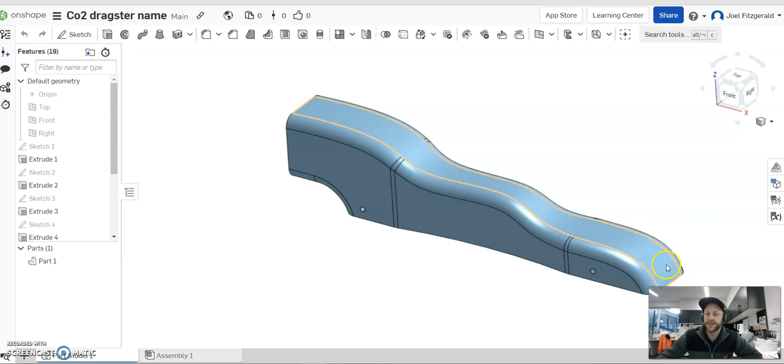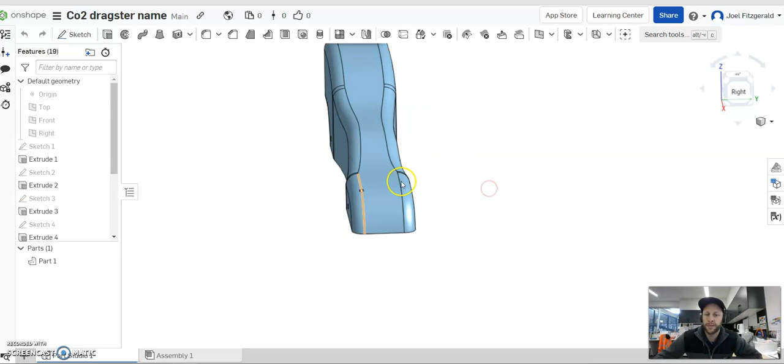Once you've got your model set up like this, I showed you in the last video how to create some fillets. There's quite a lot you can do to shape and style your work from here. I've seen some students cut out holes and extra pockets for weight saving, or cut things through the guts of it all the way through. There's probably quite a few things you can do to the design, so have a go at doing what you can to make it unique.

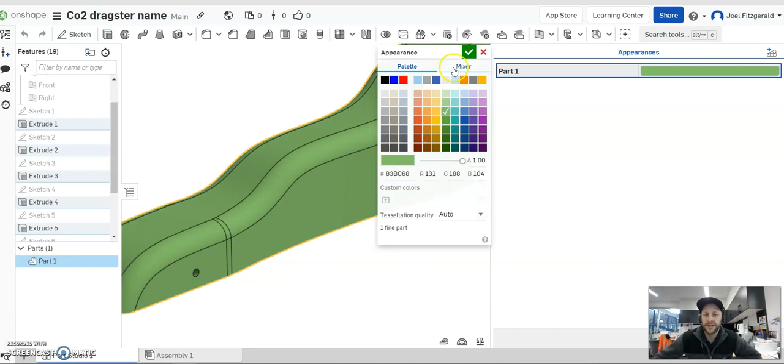Beyond there, a few other things you can do is change its appearance. By default, it's blue, but you can change the color to whatever color you want. It's just going to show you roughly what it looks like. Obviously, that's just going to be the graphics in the program.

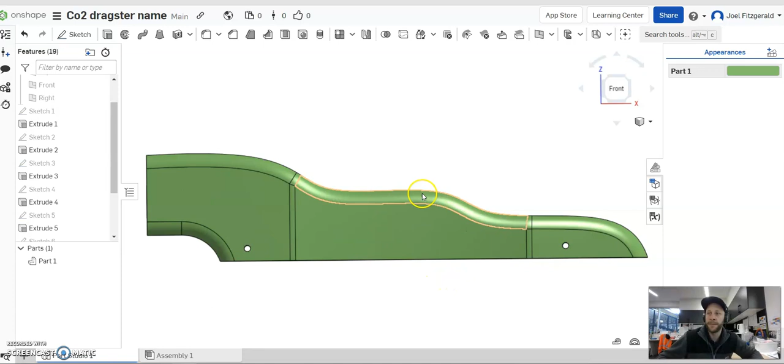The next thing you can do before we do some drafting is chuck some wheels on your car to get a bit more of a visual of how it's going to look. I'll show you in another video, the final video, about how to do assemblies, but it's not a must that you do that. You can just simply sketch on what you think the wheel is going to look like for proportion.

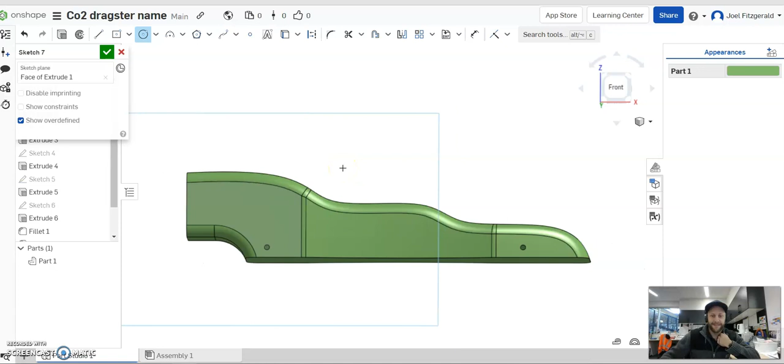What we can do here is click the sketch tool and click on a face, and then draw some circles where the axles are. These come down, so the back wheels are going to be 40 millimeters diameter, and the fronts are 35, slightly smaller. Try to pin that in the center of the holes there, then use the dimension tool to draw them up. The back wheels are 40, and the front wheels are 35.

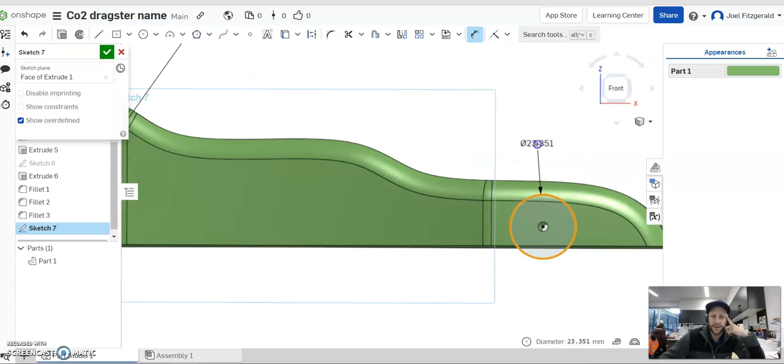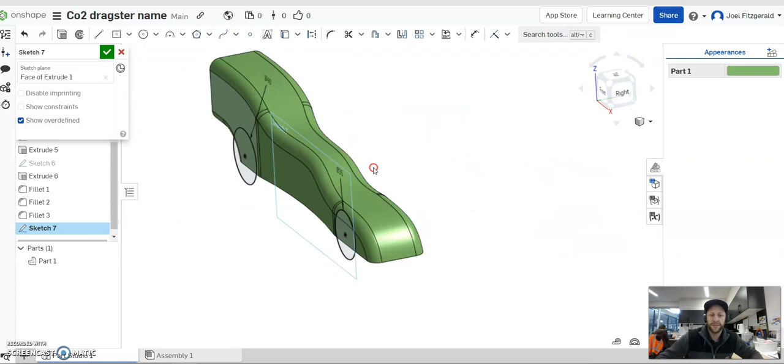Press escape to get out of the dimension tool, and there we go. So without actually extruding them, you just get a good visual from the side of the proportions of your design. Mine's got a cool little relief at the back here. That front wheel is going to look quite even with the height of my body, and if I extrude from there, it's going to make it look 3D. Happy with that? I'm going to click the tick to finish that.

I'm going to right click and just turn off that sketch, so the little eyeball turns it off. Design's ready to go.

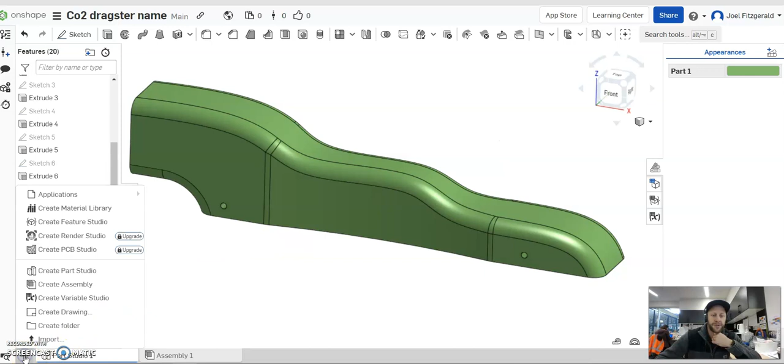Now I'm going to show you how to draft it. In OnShape, bottom left, this little plus tab, we're going to go create drawing.

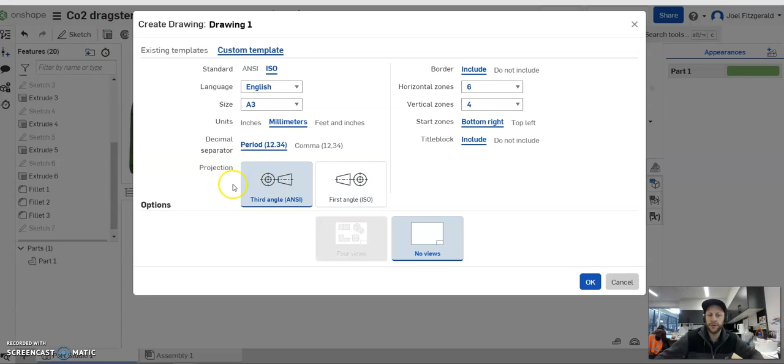In this setting, it's really important that you use the settings I tell you here. Go to custom templates. The drafting standard we're going to use is ISO, English is our language, and change A4 to A3 so we can fit this on here. Millimeters is fine, and change this projection to third angle, that's what we use for our view layout. Then go OK, and it will create the template for you.

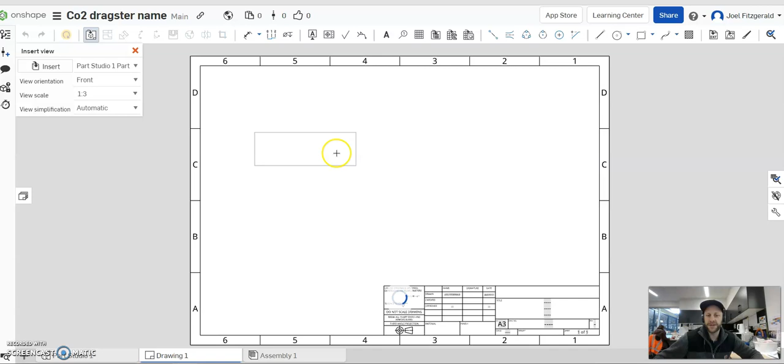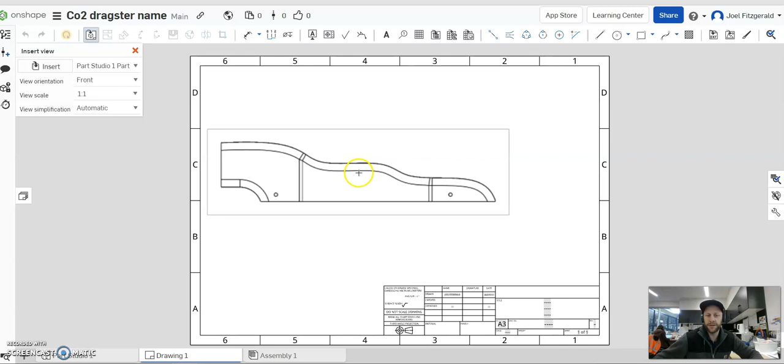Now this should pop up, asking what are we actually going to draft here, so we're going to choose our part 1. Then it's going to try to throw us a view to start with. On the top left here in the view command, we want to change our view scale to 1:1, giving us a full scale view. This is going to start with our side view, which is perfect. Now let's place this in the center of the page, but off to the left. There we go, there's our first view.

Now from here, it tends to want to go into drawing our projections, so we do want a number of views here. If I drag above my work, I'm going to do a top view.

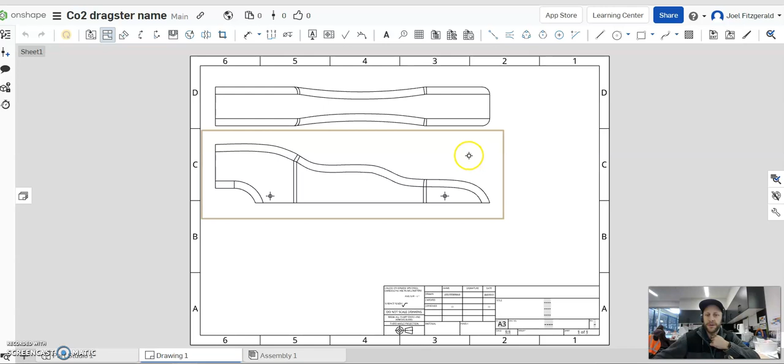And I can also go below... no wait, let's press escape for a sec. To do more views, we go over to projection here. You always need to start by clicking an existing view before you drag the projection. So I can click on that side view and draw a view out here, and I can also click again and do one underneath, like so.

It's pretty important that you have at least 3 views - a side, a top to see these cutouts, and a front view as well. It wouldn't hurt to do a bottom view too, it just gives you a bit more perspective of your designs.

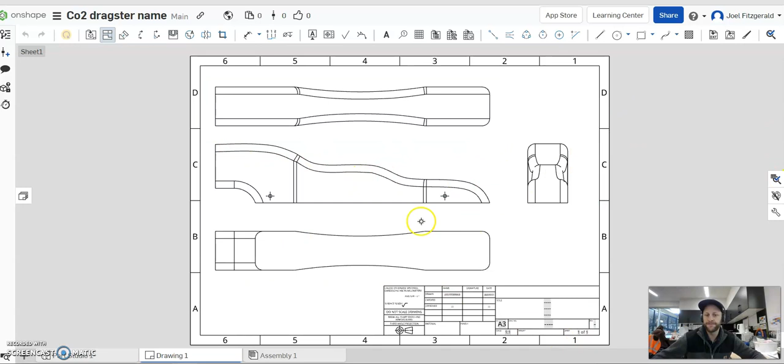And that's basically what you need in order for us to actually print this full scale and cut this and use this as a template for our construction.

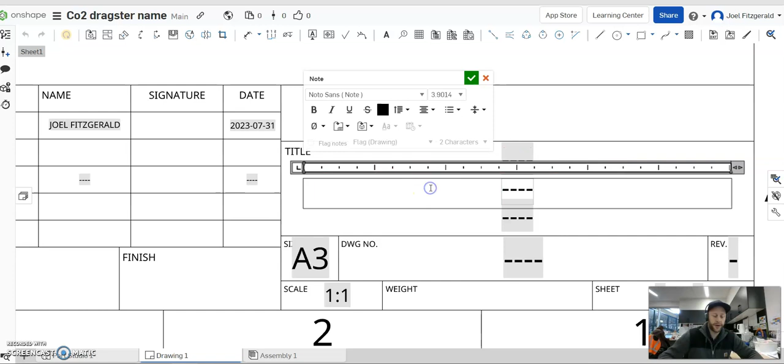Down here in the title block, you can click on these values here. So let's just double click top here. Double click here. So the title is going to be CO2 Dragster.

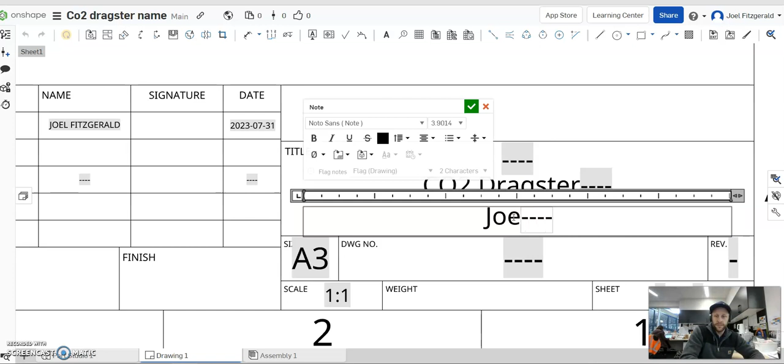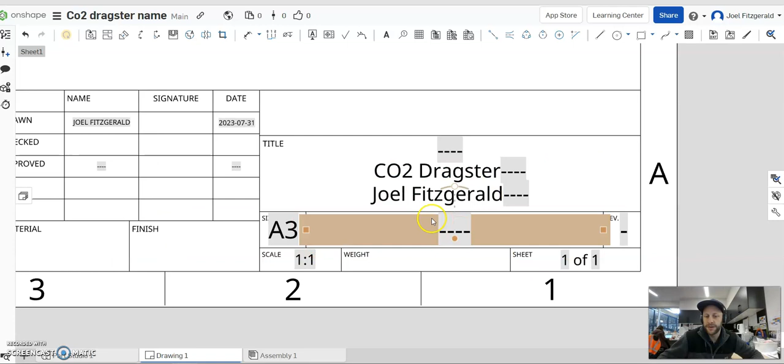That's fine. I'm just going to do revision 1 to start with in case I change this down the track - I can change it to 2. Cool. All right, just put your name there.

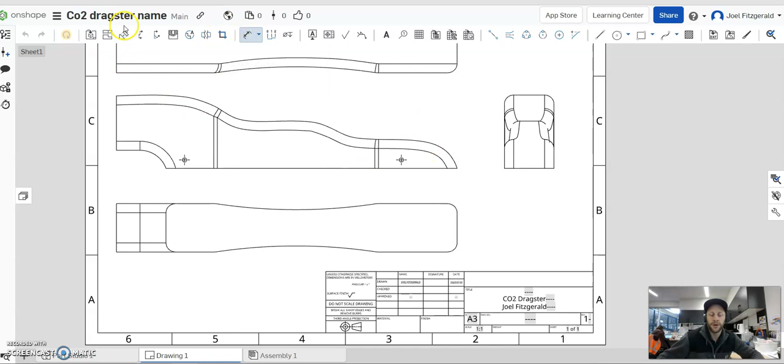Now, the last thing with our drawings we can do here, which is important, is to do some dimensions. So just like your sketches, you can use the dimension tool on here. This is going to be really useful to double check that everything's going to comply with our specs.

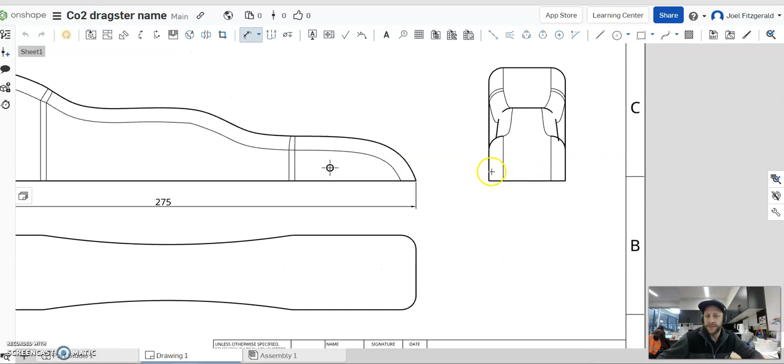So I can go point to point, for example, draw that 275. I'm going to check the height as well, which is 60. From this view here, I'm just going to make sure that my width is 40.

Yep, that's good. These hole positions are probably really important as well because you may not be able to use your template, so you might better use your drawing to check these. So let's go from this end to my hole center - it's 45.

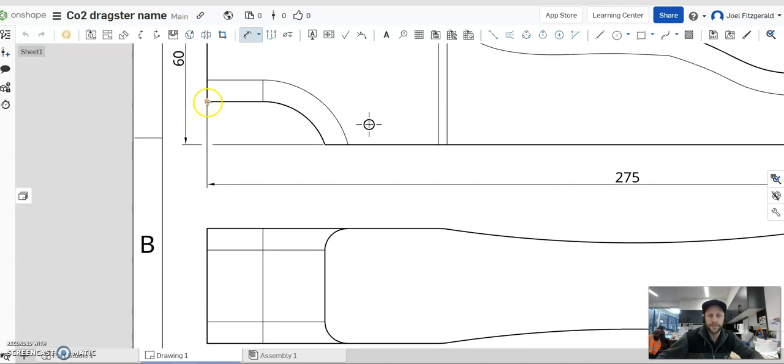This one I go from here to my hole, 55, and then double check from the bottom there, 7. Bottom to that hole is also 7. So at least I can use my drawing here for construction.

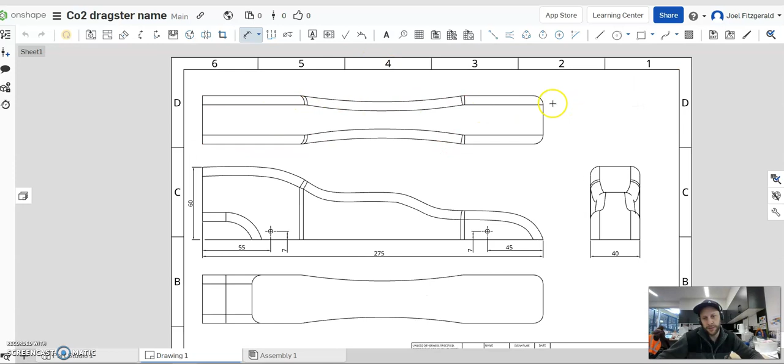This top view is pretty cool as well. That might be a little bit hard to get the measurements of that one, so you could potentially measure where that is - a little bit hard to grab there, but you can roughly get from these ends to the curve. Bit of a weird dimension, but at least shows you what the go is there.

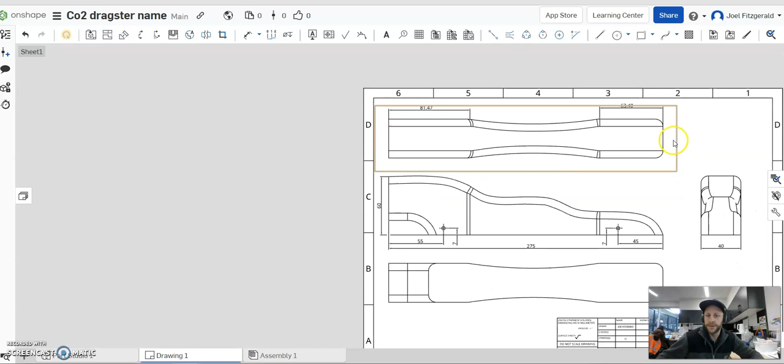That's not very useful. Cool. That's all you need to do in this drawing here - those particular views and those dimensions.

What you can add, we go back to insert view, using the same part. I'm going to actually put in an isometric view. You see how this is really big and it won't fit on your drawing. I'm actually going to downsize this one, so maybe make this one 1 to 5. Oh, it's tiny, maybe 1 to 4.

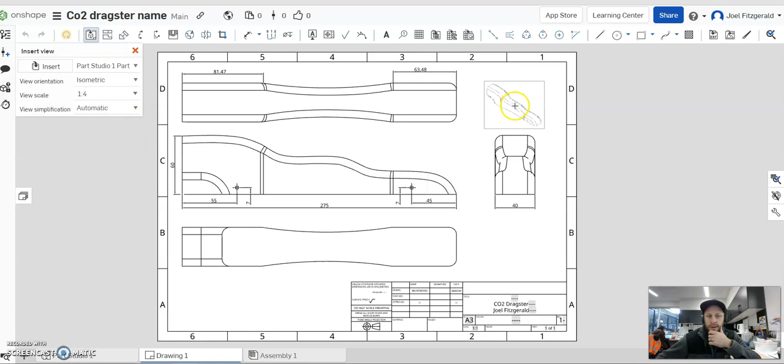Still little. I can put in a view there - 1 to 4 isometric view. Cool, that is it. That is your drawing.

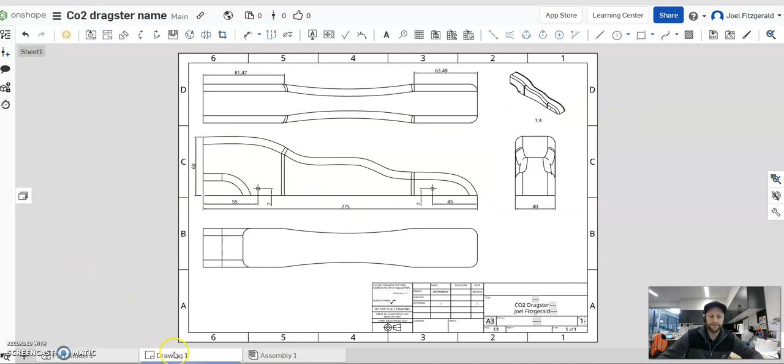By default, it saves it in your work here down at the drawing. And then in order to get this out of OnShape, one thing we can do on this one is right click and go export. We can export this drawing as a PDF.

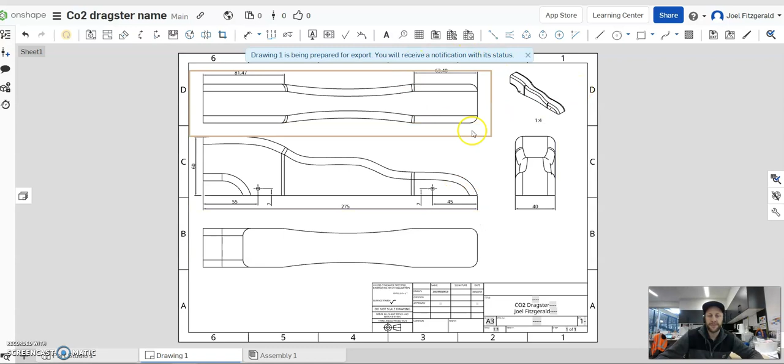Leave everything as it is. Drawing 1, go export. Just takes a few seconds to sort this one out. It's going to ask you where to save it, so chuck this on your H drive. Drawing 1 should be alright there, and go save.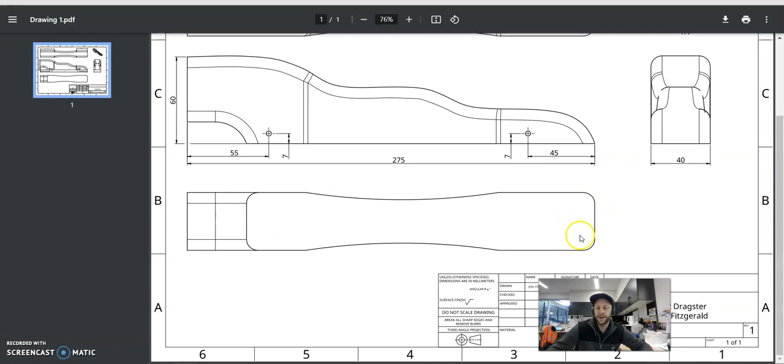And that should download your drawing. There we go, you can preview it. If I now go to print this document, what I can do is print to the Creative Design printer.

I'm not sure how you'll go actually printing this yourself. What I will ask you to do actually is to submit this to Daymap so I can check it with you and then we can print this off.

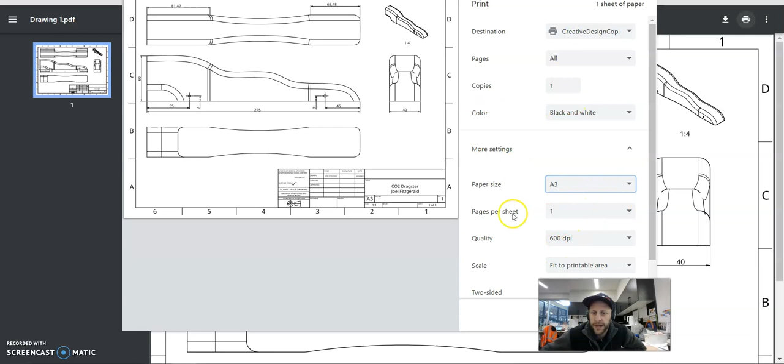But we can go in and set up our printer for A3, make sure everything is fit to paper, custom, make sure it's 100%. That will double check that everything's right. And then do a print.

We're going to do 2 of those, so you got 1 for construction and 1 for reference. And tickety-boo, off we go.

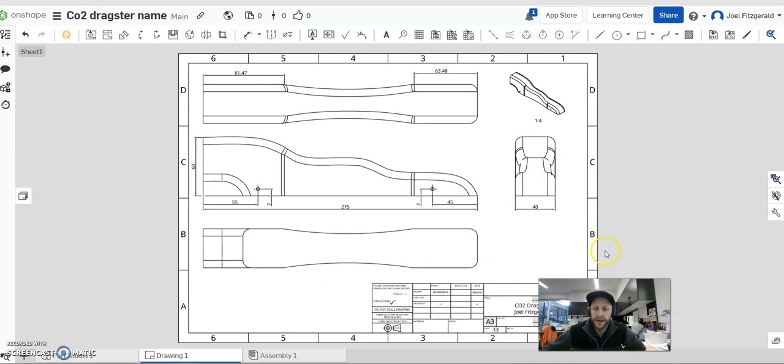Cool, so that's the basics of drafting in OnShape. Don't forget to put your name and your dimensions on your parts. Best of luck.